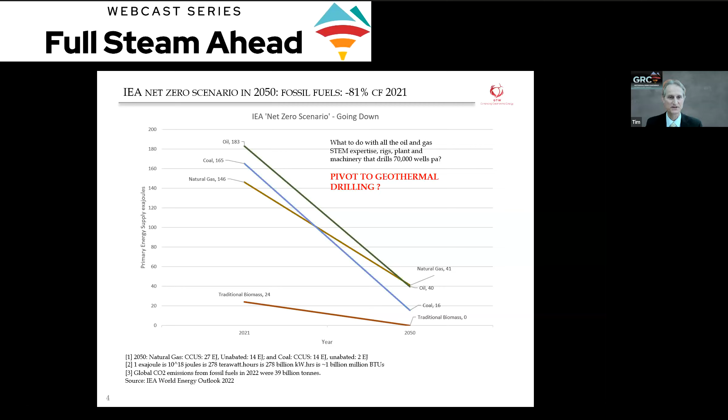My key question is, well, there are 70,000 wells drilled each year, or that's the plan for the next 3 or 4 years globally. That's an awful lot of equipment and an awful lot of people who know what they're doing when it comes to drilling complex wells across the globe. Perhaps this is an opportunity for them to consider pivoting to geothermal, because as I'm sure you know, many of the technologies and equipment used in the two industries are the same or very similar.

So what does the IEA think is the right way to achieve this net zero target? Well, there are perhaps no real surprises. You've got wind, solar, and bioenergy going up, nuclear doubling, and a bit of hydro. There's an awful lot of hydro in the world now, so there's not a lot you can do more.

And this other category called 'other' - I suppose you won't be surprised to know that somewhere in there is geothermal, but it's so tiny that the IEA don't feel there's any need to split it out. But I do. So that's where geothermal stands.

I guess some of you will have seen this. To me, it was very arresting. This tiny little dot down there is the amount of fossil fuel energy in the earth's crust globally. This is the amount of fissionable materials, and that's the amount of crustal geothermal. I want to make the point that crustal geothermal goes down to quite a deep level, probably deeper than we'll ever reach, but there's around 20 to 30 million years of supply at the 2050 level of energy use, if you could deploy crustal geothermal totally.

But the reality is, in 2020, this is how much electric energy and global direct heat energy the globe actually used that was geothermal. So really, we are nowhere. And the question is, can we actually make a material impact in the next 35 years or so?

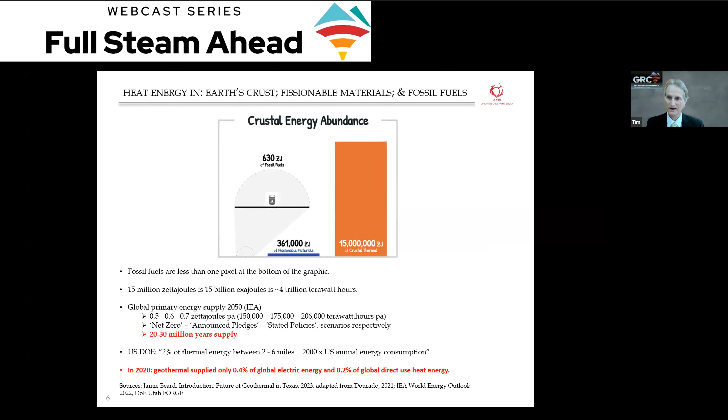One thing I'll pick up on there is that nuclear - they're looking to double nuclear in the next 30 years. That's the objective the IEA put out. Let's just look at that. Why? Let's look at geothermal versus nuclear. In my view, geothermal has enormous advantages over nuclear in pretty well every category you can imagine.

You can read this as fast as I can say them, but they're reasonably obvious. It's certainly cheaper. There's an awful lot less baggage, both in the initial planning applications and permitting, and the views of the local population, and then of course in the abandonment, 60 or 70 years thereafter. It's also much more flexible in terms of load following, although modern nuclear reactors do have greater load following than the old ones, where in fact you're at 95% capacity utilization, and that was it.

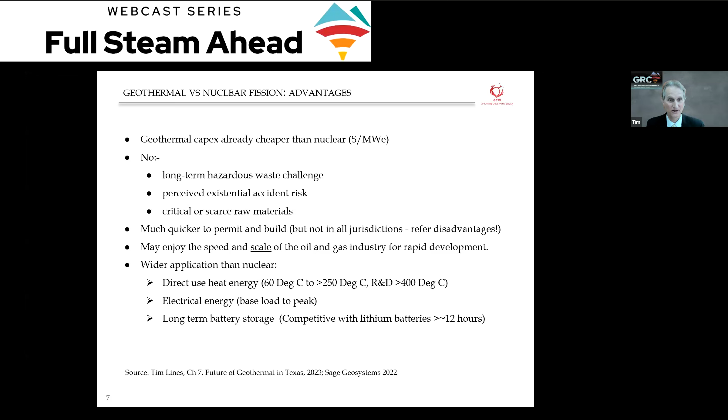But look at that, and also in terms of temperatures, we can provide from 60 to 250 today quite easily, and a lot higher later. So that's kind of where I think there are disadvantages for nuclear.

The most important is that most of that energy is in hot, dry rock, and therefore we need to frack. Also, for some of the technologies, there are fairly substantial parasitic pump loads - I guess 20% is the number I keep working up. And of course, last but not least, a ton of water is worth nothing like as much as a ton of oil.

Since generally speaking, you're deploying the same technology, capital, and people, when it comes to investment, the rates of equity return are much lower. That's the big challenge. And indeed, for a lot of reasons, that's why it's been quite hard to get geothermal off the ground. But by no means, in my view, is it an impossible task.

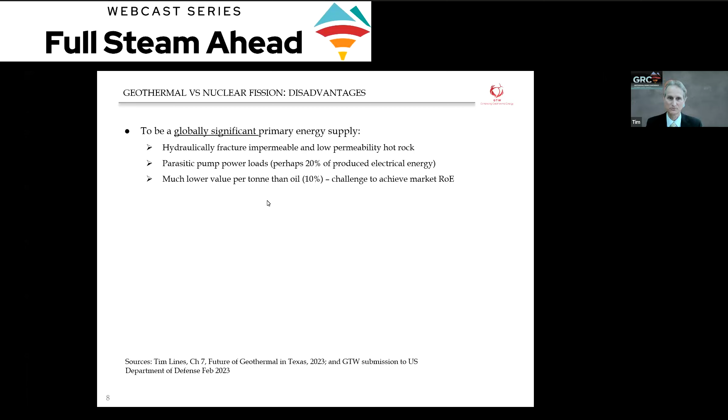So for those in the audience I don't know, I thought I'd at least introduce you to what a comprehensive frac job looks like in the oil and gas industry. This is roughly what you'd see if you had a drone - this, of course, is above a typical Marcellus frac site, and that gives you the eyeball view there.

This is a pond which we use to pump our frac fluids. Those from Fervo and others will know all about this. That's what we prop with - we prop with several things. Actually, we prop with bauxite for very high tensile stress regions, but generally speaking, just fine-grained sand.

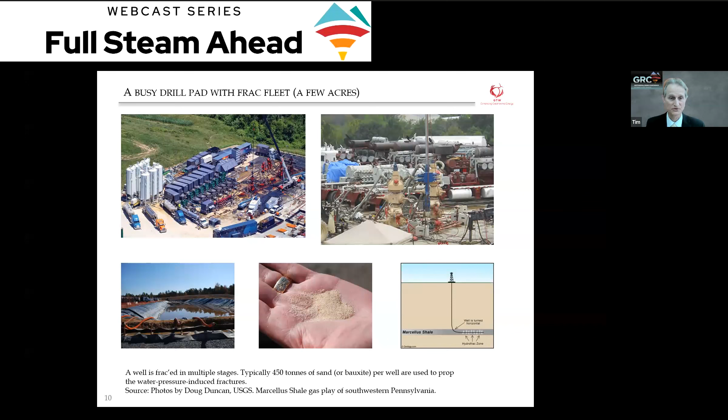I'm sure you've seen pictures like this before. And when it comes to EGS, these are the kind of technologies that would be used for an EGS well or wells, like, for example, it will be happening at FORGE in a month or two's time. For those not so familiar with what this looks like subsurface, they're like penny fracs, really.

Some of them are squashed a bit, but what we're trying to do is create a squashed penny so that we get some height and a lot of length, so we can maximize the distance between our shale wells, but the same is true for injector-producer pairs. The advantage of fracking in shales or indeed some clastics is that you get a natural barrier at the top and bottom of those reservoirs, which helps control the frac.

Whereas if you're fracking in a granite or basalt, which is fairly homogeneous, the fracs tend to be pretty well circles, they're pennies, and it's quite hard to control that and make them more like a squashed penny. Though there may well be people in the audience today who can tell us more about how that can be done.

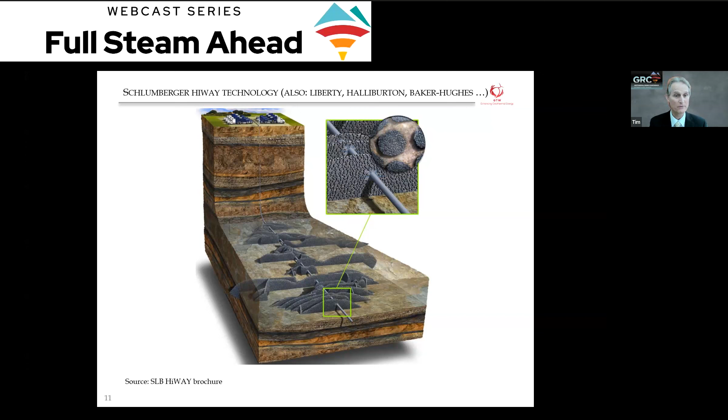So this is quite normal. There's a fairly significant and rigorous traffic light system, but we're looking at something like 4 on the Richter scale before anybody gets excited at all, because in Iceland they're pretty used to earthquakes anyway. A human-made earthquake to increase the amount of geothermal heat for Reykjavik is no problem to anybody, really.

One lovely fun fact I found when researching for this is another way of getting a magnitude of 1 on the Richter scale is to get yourself a 0.6 mile long freight train and rumble it down a track. If you're skillful, you can deliver a seismic quake of 1.0, which is a very cheap source of seismic for a seismic survey. So there we are - a thought just to lighten the load a bit.

My real objective here is to say, what is it that the oil and gas industry have got that could potentially be useful to the geothermal industry? I'm not going to focus on technology - I'm imagining in the audience there are many people who know more about how geothermal technologies are applied and to what extent oil and gas technologies could enhance those, and vice versa. That's not my focus here. What I'm going to do is look at a wider picture about how we can use other aspects of the oil and gas industry to help accelerate geothermal developments.

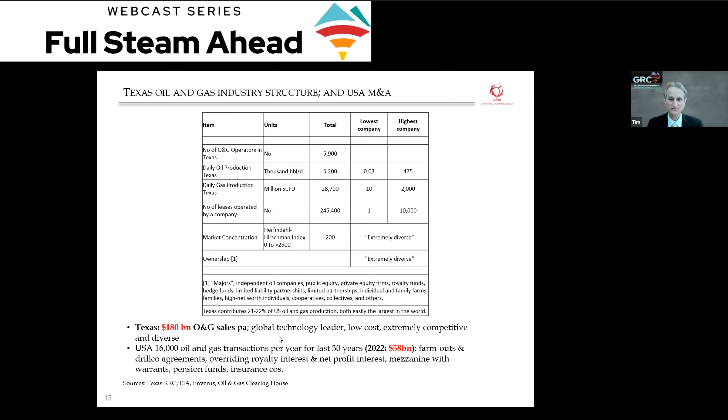So PE, private equity, and a few listed vehicles. So nothing like the same level of variety, and of course nothing like the same scale.

And it's very important to be able to move efficiently assets on once they no longer serve your purposes for your particular risk category and your investors or whatever it is. And when you have such a low number of transactions, that's a bit of a block to moving to an efficient marketplace. And the actual value - if this were the approximate number of transactions, then you're looking at about $150 million a year, which again, you know, is very small compared with the billions we saw before.

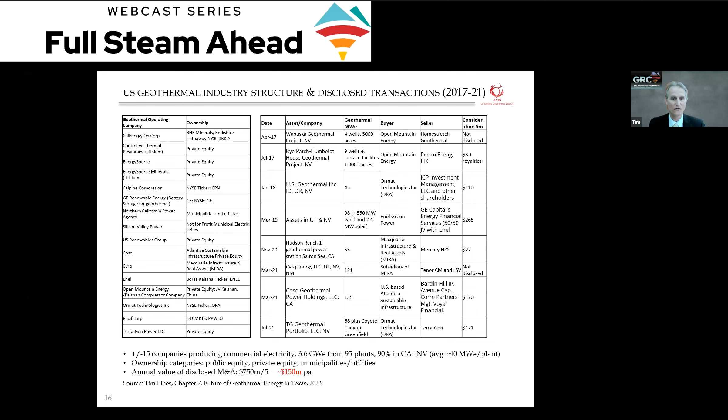So that's the kind of characterization of the geothermal industry as I see in terms of structure.

Let's look on. There's been quite a lot going on in the last 3 years, certainly since I've been waking up to this. And I expect a lot of these names you'll recognize. They're all upstarts, they're all new entrants. I mean, some of them also very big companies, but they're all getting the message now that it really is interesting and worthwhile deploying capital and expertise to geothermal industries.

And as you can see, very big companies are in the news a lot now. Most of the oilfield service companies are now doing something. Nabors, you'll recognize some of these. But actually, I think Jamie Beard worked out there are over 200 accelerators and very small companies started up in Texas alone in the last 3 years.

Some of those have risen to the top, as it were - Fervo, I think everybody knows, Criterion, Sage, and they tended to link up with some pretty big players. But plenty others are actually thrusting there as well. I mentioned a few there, and some interesting names like Google.

And the other thing that's happening is there's new structures forming, and here's some in Texas. I'm relying on Texas because that's really the only place I have a lot of knowledge of what's going on in the USA geothermal sector. But as you can see, people are getting together and forming appropriate organizations for lobbying and for sharing information, universities getting together to share expertise.

And the other thing is that Project InnerSpace, based on the success of the Texas study, has now, or is on the point of expanding that to 10 more states within the USA. So to try and roll out the same kind of detailed analysis of the prospectivity of each state and all the assets associated with it. So a very active and very exciting place to be.

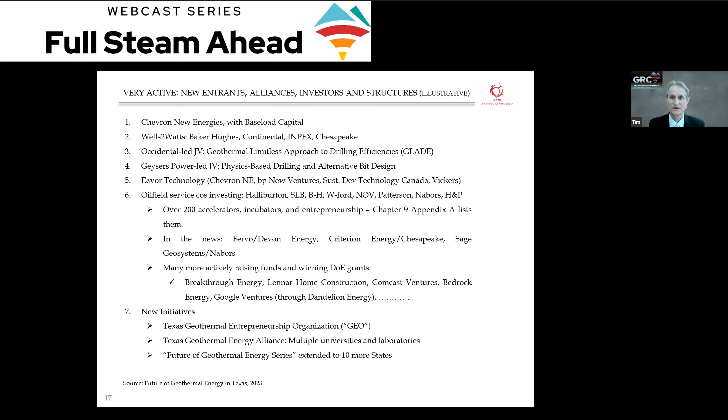I just wanted to talk about finance a bit when it comes to being a small company. My view is that geothermal companies have pretty well the same challenges that oil and gas ones do, except the revenue stream is much lower for the same level of risk. But I wanted to make sure I articulated the kind of processes small companies have to go through in order to get to a stage where they're material and can start doing projects.

Most of this is equity. This is where you have to give up part of the company or part of the project in order to attract investment from someone who is hopefully aligned with your objectives, maybe has a big balance sheet, and maybe has technology or other aspects that would support you. But this is the hard one to get going.

Startups normally need $3, $4, or $5 million to get going to do something that will add value to an asset. Once you've done that, you can start saying, okay, we've got something that's certainly worth selling some part of. But in order for us to then add value to it, maybe drill a well or acquire a seismic survey or some other information.

And that's when you go to a venture capitalist or venture funds, etc., and try to cut a deal where they would pay for a well or two in return for maybe 25 to 50% of the equity in your company or in the project if you've got a kind of umbrella structure. And so it goes on.

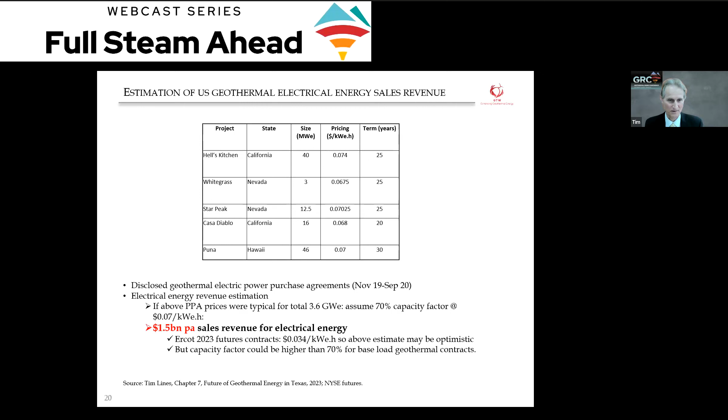So let's look at the other side of the equation - what about heat? So direct heat. I had a look at the USA and said, okay, how much heat energy is there other than ground source heat pumps? I was absolutely flabbergasted when I did the calculations - I did them 3 times, I couldn't believe it. But the actual gross revenue stream from heat sales, excluding ground source heat pumps, which are very large, was $28 million if I assumed $4 per million BTU. So that's for the whole of the USA. In essence, the USA is not interested at the moment in providing direct heat to any of these categories.

And the interesting ones to me are industrial applications, where it's probably 0.2 or something. Certainly we all know about greenhouse heating, and that's why that's there, fish farming. But they're insignificant.

Just to give you a contrast, look at China, a similar sized economy. They're looking at roughly $750 million using this $4 million BTU proxy for the value of energy in both countries. The big differences are district heating run by geothermal energy, and bathing and swimming. But when I look at the ones that interest me, like industry, there's nothing there, $30 million, nothing, a little bit of farming and heating. So although they've got part of the story, they've only got part of the story.

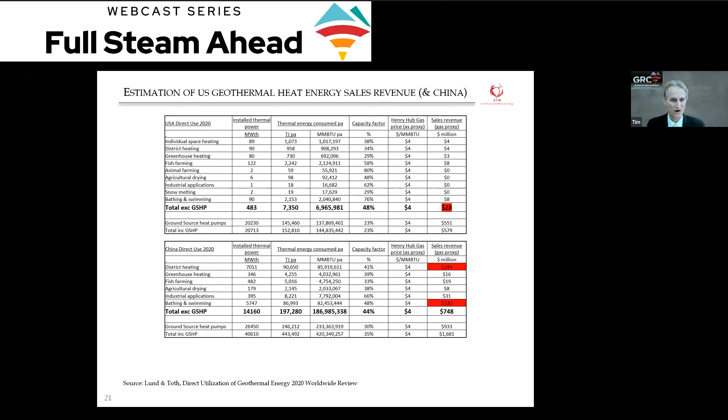So let's look at what the potential might be, and I'll explain why I'm passionate about heat and more cautious about electricity. Just to show you what China's been doing - there's nothing here that's a particular surprise, it's just the scale.

Roughly 70 cities in China are partly or totally heated by geothermal district heat. That might be millions of people - I don't know the exact number, but it's going to be very many millions. These are rather pretty pictures about the kind of things we all know you can do with district heating.

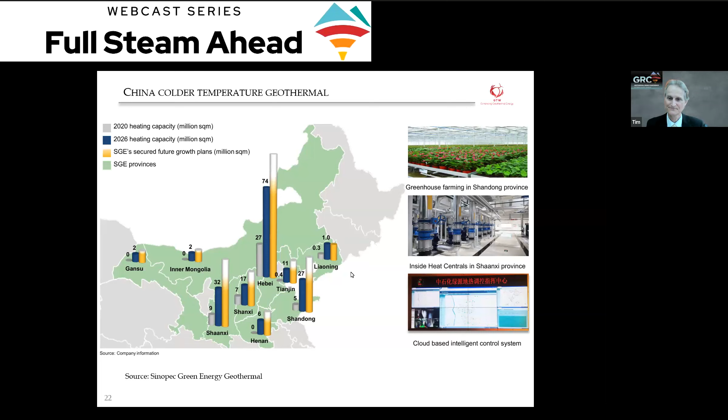What is interesting when I looked at why it has rolled out so effectively in China is actually the flexibility and the passion that the municipalities have in making this happen, to the extent that they revise the building regulations in their municipalities to ensure that geothermal district heat, which tends to be colder than coal-fired or gas-fired district heat, that the buildings will be able to accept that and still be warm enough. So these are air tightness regulations, insulation regulations. That's a pretty impressive thing for a municipality to do - to say we will fast track geothermal whenever it's possible.

And actually, they got to the stage now where geothermal district heating on a dollar per MMBTU basis is cheaper than gas and coal. So it's not only clean, it's also cheap. That's a pretty good result, and just shows what you can do if you start to get everybody working together within the circular economy you need.

So why am I more interested in heat than electricity? Well, let's look at electricity for a moment, compared with its main competitors today, which are gas and coal within the USA, and nuclear to a lesser extent, and maybe more in future.

This drawing, which many of you will have seen in one form or another, comes out of a New Zealand paper in 2012, looking at something like 90 or 100 projects around the world. They looked at the reservoir temperature as a source of enthalpy, and then looked at the actual outputs - after all the losses at the factory gate, how much electrical energy did you get for a certain amount of thermal energy produced from the reservoir? This rather depressing graph shows that even at 180 centigrade, some of their technologies were producing only 8 or 10%.

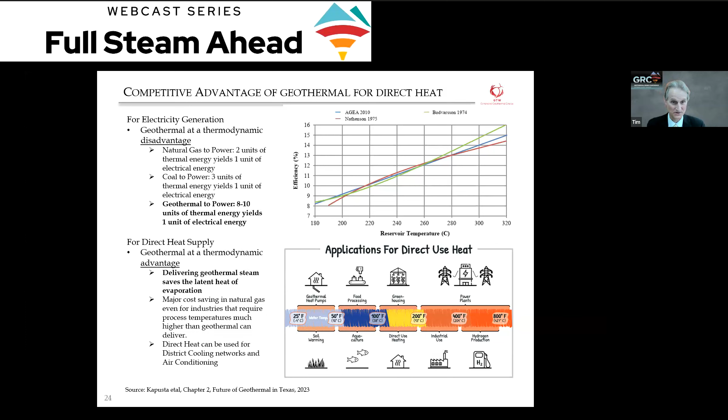I've taken the food industry in the USA and got some data from various sources, including the Department of Energy. Just looking at these numbers, you don't necessarily have to have a feel for them, just look at the size. We're looking at roughly 67 gigawatt thermal, assuming 100% load factor, which is wrong but gives you a like-for-like number, and around 90 gigawatt thermal for the processing industry. That's just for food, okay? And never mind the other things which probably geothermal can't do very much for.

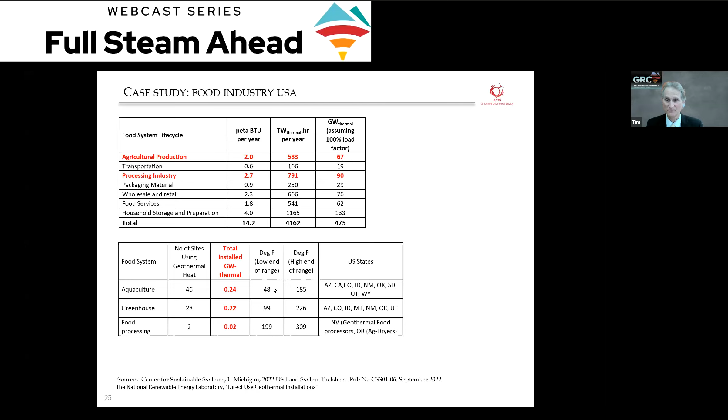Now if you look at all of the aquaculture, greenhouses and food processing that I could find within the Department of Energy website, and look at the total installed gigawatt thermal and compare it to those numbers, this doesn't even come to half a gigawatt thermal. So it shows you how little of the potential for using direct heat from geothermal has actually been applied to these sectors. Look at the ranges - these are eminently achievable by a lot of geothermal plants.

Quite a lot of states are involved, you see this. I actually had a note from the Commonwealth of Pennsylvania, saying why weren't they on it? I couldn't find anything on it. But I did make the argument that there's an awful lot of milk pasteurization that goes on in Pennsylvania, and pretty well all that milk has to be heated from, I don't know, 60 Fahrenheit to 100 - I don't know what the pasteurization temperature is, 140, 150 Fahrenheit.

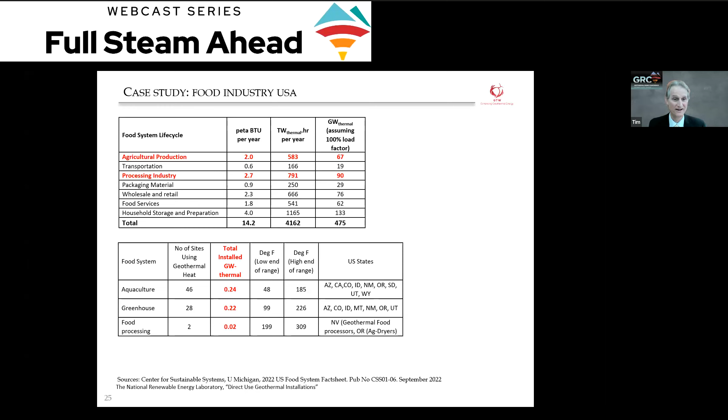At the moment, that's done either with electrical heating or with natural gas boilers producing water, which then through a countercurrent heat exchanger heats the milk up to the appropriate temperature for pasteurization. I thought, well, I can't think of a better and more obvious application for using geothermal heat above 140 Fahrenheit than just passing it into a massive milk pasteurization plant, producing - I think it's billions of gallons of milk per year - pasteurized just in that one state.

So to an extent I've said some of these things. I just want to say how much more efficient it is - although the data shows that in the USA, geothermal is actually quite a high emitter of carbon dioxide. The reason is because there are methane co-emissions in most of the geothermal plants on the West Coast.

But if you were to go for hot dry rock, the kind of EGS or AGS systems, then these emissions would drop from 19% to 1 or 2% of a typical fossil fuel one. It just so happens that the particular set of assets being developed within the USA have unusually high methane co-emissions. But if rather than making electricity with your geothermal heat, you just use it directly for some of those processes, then the carbon dioxide emissions drop through the floor compared with any fossil fuel.

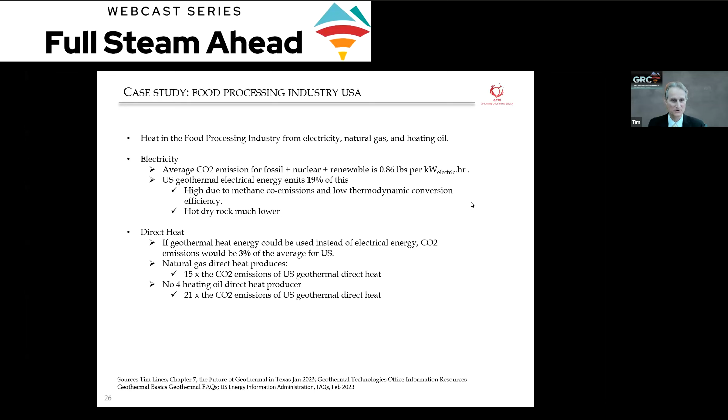If you look at natural gas, for example, it emits 15 times those of geothermal heat, and number 4 heating oil, the most common liquid fuel used for industrial processes, 21 times. So there's a huge potential target there to decarbonize industry. And here's a nice one - I've tried to find all the different potential industrial processes in the food industry and what temperature they needed.

And then I tried to color code this by saying, well, how deep would you have to be depending on whether you had a low, average, or high geothermal gradient, so that those of you familiar with these things would say, that's an easy well to drill, and you could view which applications could be accessed as low-hanging fruit. As you can see here, there's an awful lot up to about 160 Fahrenheit, and it's pretty easy to get there even with a low geothermal gradient. Typically the USA is around here, or even there sometimes.

So you're looking at wells of 7,000 feet, which for an oil and gas operator or veteran from the oil and gas industry, and I'm sure from the geothermal industry too, is a walk in the park. I mean, it's nothing. It only demands planning and a couple of casing strings, unless you're unlucky enough to be in a hydrocarbon-rich area and have to case off the hydrocarbons. It's a pretty simple thing.

And even at amber levels of 270 Fahrenheit, you're not looking at that deep. I mean, 19,000 feet - if you're unlucky enough to be in a low geothermal area, that's not a big well really. If you turn the corner, you're probably going to be limited on the size of your horizontal lateral, maybe only 3,000 to 4,000 feet. But that's the low case.

If you look at more optimistic cases, you can get those temperatures quite easily at 10,000 to 13,000 feet. Every Haynesville well is 13,000 feet and could have a 10,000 foot lateral. So these things are right within the normal ballpark of the thousands of shale wells drilled on an annual basis within the USA - I mean, 15,000 wells a year in Texas alone. So I think there's a lot of opportunity here if we put the mindset on.

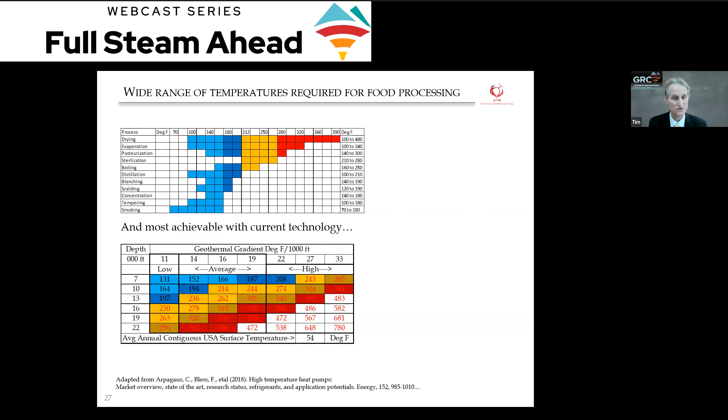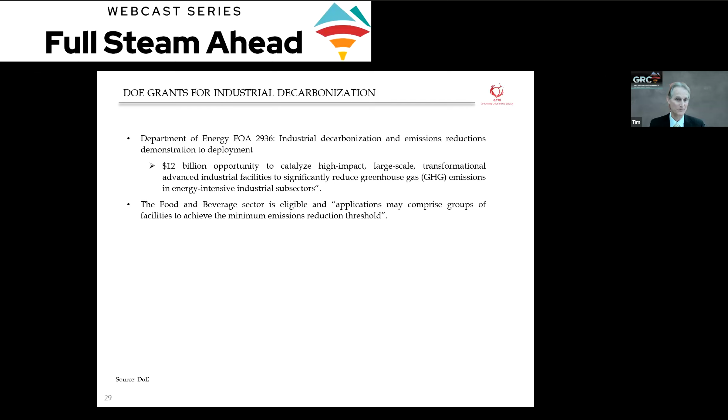There's demonstration projects for the different industries. So the Department of Energy are on this and very motivated and keen for the kind of things I've been saying to actually happen, not exclusively with geothermal, but with all the clean energy sector. This is another one I liked - actually, this is in Iceland, but the technology is there.

But you're getting an idea of a potential application here, direct air capture, and this is just one of several technologies which have been looked at. Occidental, of course, are looking at their own technology here. So there are multiple applications you can apply geothermal to. It's just a question of changing the mindset, so you can continually think about the customer and their needs, rather than - I'm talking to oil and gas people here, not geothermal - our typical oil and gas thing, which is once a product's out the door, it's just a commodity, and leave it to someone else to transport and sell.

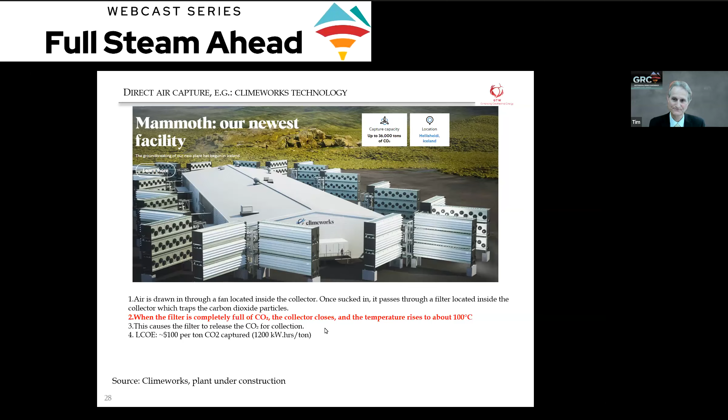One of the things I'm really passionate about, and I think it underpins the extraordinary health of mergers, acquisitions, and investment in the oil and gas industry, is a standard resource evaluation statement system. Now, I happen to be mentioning one of the three here, which is the Society of Petroleum Engineers Petroleum Resource Management System, not least because as a competent person, this is the one I apply most within the oil and gas sector. But the others - the SEC, NYSE, and in Canada, COGEH for the TSX - these are very similar standards.

And the most important thing about these standards is that they are understood and accepted by everyone in the industry, from the regulator, the stock exchanges, to the investors, to the operating companies, to the competent persons, the companies like Oilfield International, Sproule, the big ones in Canada, etc.

Because there's a requirement whenever you conduct a major financial transaction in the oil and gas sector, you need a third-party auditor to make a statement of what your assets are, according to a very strict set of definitions. That means, because there are so many transactions, you have a virtuous circle, an enormous number of independent auditors. You probably know the big ones, DeGolyer and MacNaughton - in the UK, US there are about 3 or 4, Gaffney Cline, I can't think of the names offhand, and a couple in Canada. They have huge competencies, and a lot of clout in the industry, and what they say goes when it comes to whether that's a reserve or a contingent resource, and everybody is happy with that.

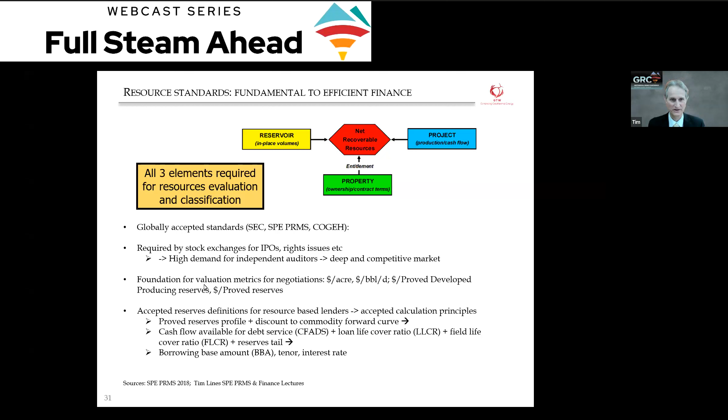So maybe 300 basis points above the 4%, so a 7% interest rate. It's all so easy, that's what I'm trying to get to. Get the point - everybody knows the language. It's dead easy, we can all do it in our sleep, those of us in that part of the industry.

We have these two-dimensional matrices completely familiar to everybody in the industry. Reserves are the most valuable, then contingent resources worth at most a tenth of what reserves are, then prospective resources not worth very much - we haven't drilled a well yet, so that's why they're called prospective. This represents an increasing level of commerciality. Have you got all the permitting? Have you got the money in place? Are you clear in your mind that you have the right capital cost estimate? And what's the range of uncertainty between the low case and the high case of what you're actually going to produce?

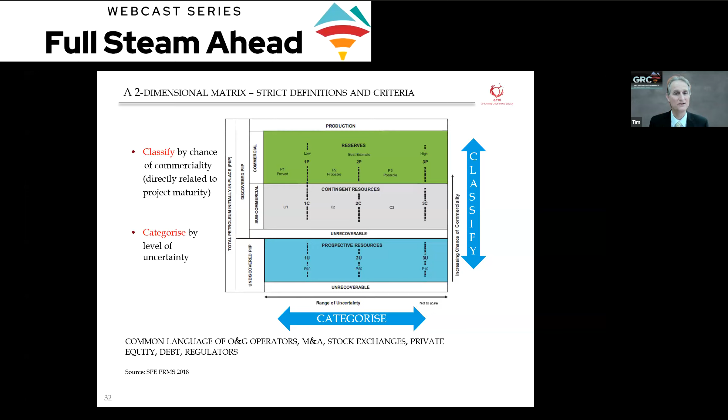That's where we are - common language. We all know it, and it makes life terribly easy in the oil and gas sector. Now let's look at the geothermal sector. There is one standard at the moment which is trying to gain traction.

Professor Gioia Falcone from Glasgow University has teamed up with the United Nations and more recently the IGA (International Geothermal Association), IRENA, ESMAP, and the World Bank, to see whether this three-dimensional matrix structure, used for mineral resources and other renewables, is a good standard for the geothermal sector. With a degree of success, in September last year the Queensland, Australia regulator adopted this as the standard they should use.

But that's as far as it's got so far. The most important thing I want to say is there is no consensus in the capital markets on what is the right resource standard - this is just a regulator. I'm talking about capital markets because unless they are comfortable with what really constitutes a reserve, there's a big barrier before everybody can agree what it is they're buying or selling.

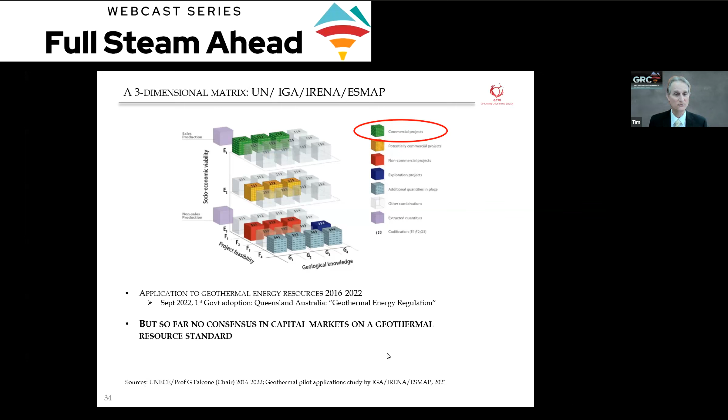So how do we do it? These transactions still take place, so I want to look at how geothermal projects are funded. For companies like Ormat, Calpine, Cyrq Energy, etc., it's easy because they've got big balance sheets and internal skills - they can fund off the balance sheet, maybe with some debt or revolving debt. That's why they're so important to the future of the geothermal sector: they have no problem putting together large sums of capital for new projects.

Now let's look at the rest of the financial community who will need to engage if geothermal is going to really accelerate as a major energy source. Private equity or new entrant public companies can really only hire a consultancy - Schlumberger's Geothermex or someone similar - and ask them to evaluate the asset. There isn't a common standard, so you use the same consultant, probably, for all your evaluations of geothermal assets, lithium assets, or whatever it might be.

It has logic and it's consistent, so a private equity firm can make a rational decision between various potential investment opportunities, and no doubt will do a good job. But if they need to syndicate - say it's $500 million and they'll take 100 and want to offload the other 400 - then what happens? The other investors have to decide whether to trust the original consultant who did the work for the cornerstone investor, or do their own work.

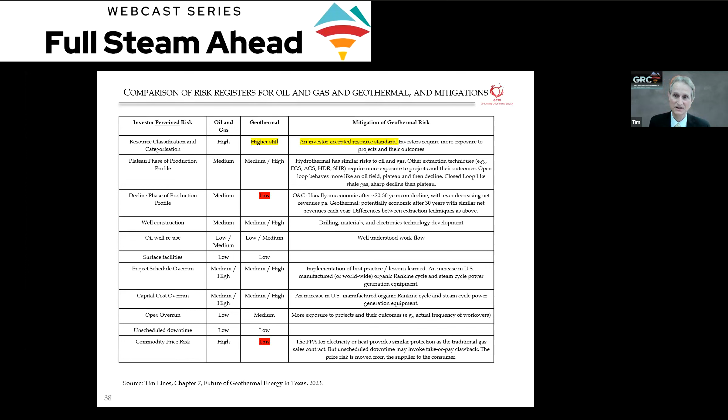What I'm trying to say is the cost of equity for geothermal projects is lower mainly because you've got less commodity price risk than you do with oil and gas, and investors have to look at commodity price risk. To cut to the chase, my view is that you can probably get away with a 12 to 15% equity rate of return, and that's attractive to investors pretty well across the USA.

In Texas, less, because the subsurface is so heavily de-risked. People know the subsurface very well, and therefore the subsurface risk, which is a major component of the total risk an equity investor looks at, is to an extent lower.

Also, because of the zeitgeist around geothermal, you've got various other institutions who won't demand even a 10 to 12% rate of return on cost of equity because they have other objectives, usually ESG. So municipalities, not-for-profits, direct use customers that a geothermal company might work with, maybe a paper mill for example, military and critical infrastructure where reliability or independence from a grid is important. All of these could well look at cost of equity well below 10%.

And if you look at what it is for wind and solar, the cost of equity there is less than 10%, even 5%, which I think is irrational. I can't see how any investor, unless they have some other uplift, could accept a 5% rate of return on their equity from a solar project.

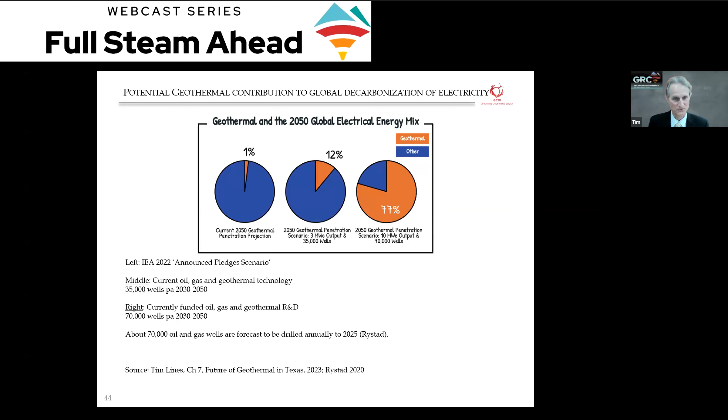If you look at the amount of heat we've got in the globe, that will give you some indication that this is well within the capability of the Earth to provide for hundreds of millions of years. Thank you very much.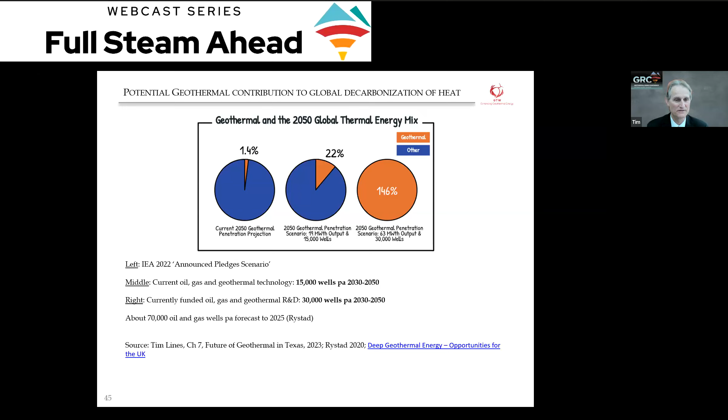It's about your investment class that you're considering and venture capitalists and what kinds of returns they look for in investments. So go ahead, Jeff.

Okay, can you hear me? So, talking to venture capital, they expect triple-digit returns, and sometimes more, and they have about maybe a 10% success rate or less of things they invest in. So when you talk about the risk profile of geothermal, that's kind of the rub.

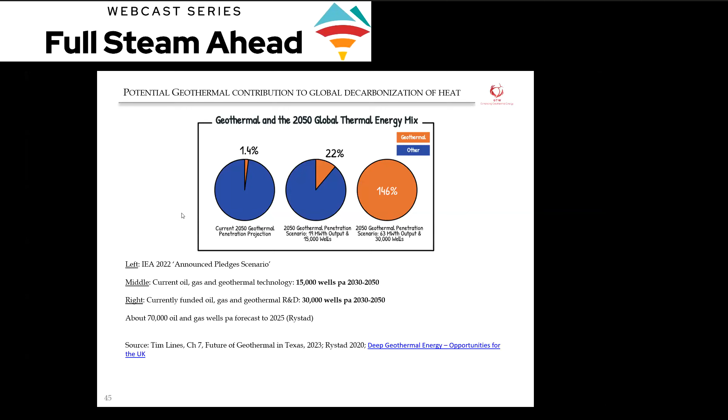So given that I agree with your numbers, just 12 to 15% is a pretty good analysis, and therefore, who are the investor class that you are targeting?

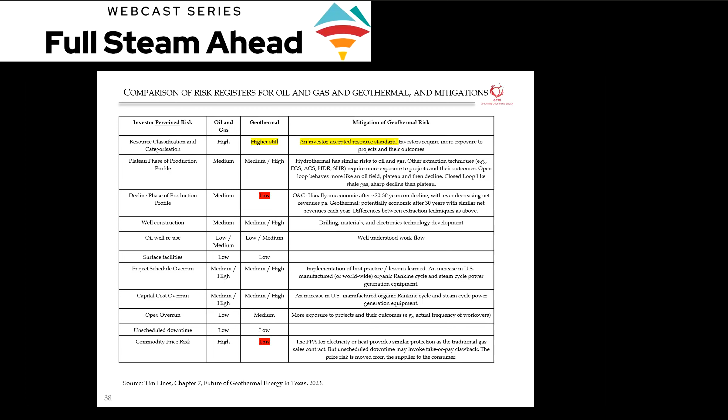Oh, okay. Well, I think I tried to give you some idea here. Okay, yeah, so we're talking about Jeff. We're on the same page here, that the problem is the initial capital, and how can you get to reasonably high levels?

Well, this is where I've come to. I had a conversation with a fund manager who said that he would be looking for 15% real terms rate of return. He would, and the reason that you're not seeing the multiples that you're referring to - I mean, you and I are the same industry.

I mean, if you're going to get a farm into an asset that hasn't been de-risked, you can be looking at 5 to 6 times your money within 6 to 9 months, or else you're not interested. And that's the oil and gas way.

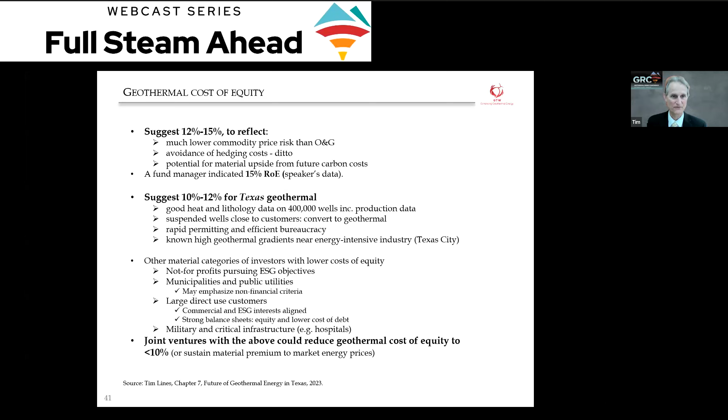But the argument I'd make is that it is a less fundamentally risky business. And the key reason is when you and I do our sensitivities for saying what is the extent of risk between the low and the high case, commodity price is always the one that you flex the most, because that's the one that can trash your project or cause it to be very, very, very profitable.

And the second is capex or schedule, and the third is the resources in the reservoir - or the second and third can change round. But the argument I've got with the financiers I've been talking to is that the one thing you can get rid of is the commodity price risk.

In the capital asset pricing model, all of that beta associated with volatility of price is pretty well removed, because once you've built the wells, both the investor and the customer have a stream of revenue where they know what the price is per million BTU, and that is one way you're de-risking it.

It's not for everybody. I think the other thing is you're pushed into selling the ESG card, and selling the card that says if you are a resource investor, then because of the zeitgeist, you're going to be finding it harder and harder to attract your LPs.

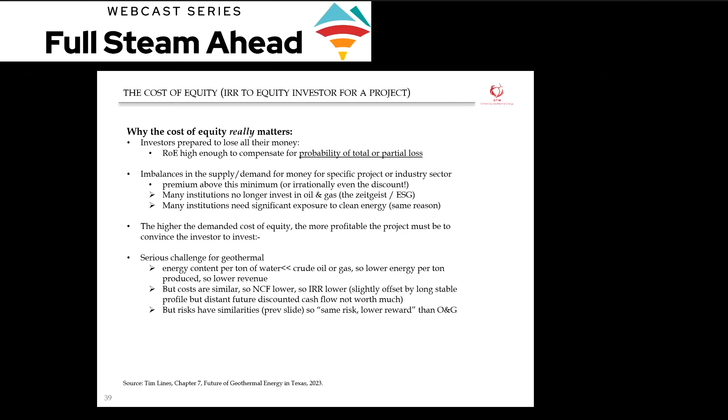Historical precedent. We had 50 years of geothermal, that's the first thing I'd say. The second thing is costs. If you look at the estimates they used when they did their economics, we challenged them. The geothermal technical section within the SPE asked a representative of the IEA why, once that 2022 report came up, it was so low, especially since they were sitting in the geothermal technical section themselves. And the answer was, well, we did use 2012 data because that was all that was available.

And if you want us to revisit our views, then you need as an industry to provide us with the data that will persuade us that what we said is pessimistic. The other thing, if you look at the logic and the arguments I put forward, those weren't within the IEA's assessment.

So they weren't thinking about what the oil and gas industry will do with all its immense capital and resources, which are ideally suited to two things: drilling wells for carbon sequestration and drilling wells for geothermal. I think that by taking a broader global view, you can become more optimistic. But ultimately, it has to be a decision of the oil and gas companies to deploy those resources and capital in geothermal and obviously CCS.

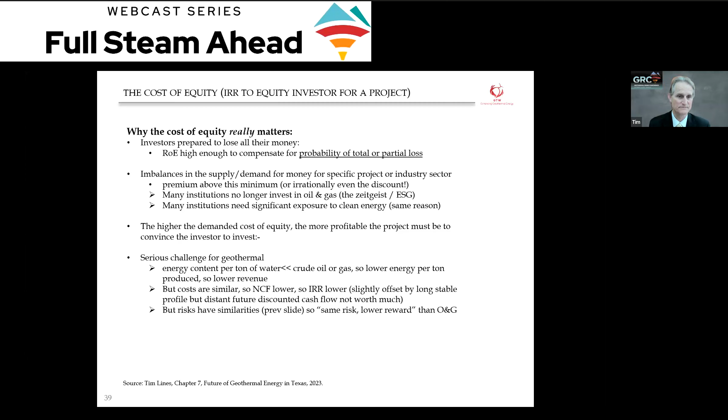I'll also add, Andrew, from my own research in this space as to why energy technologies remain stagnant: there are social and policy reasons that geothermal is still a somewhat nascent technology, and the geothermal industry does not receive the same types of support from governments, both in the United States and abroad, that all other energy technologies have received over the last 100 years. Without those government programs that reduce the risk of exploration or help geothermal move across that commercialization gap, geothermal will continue to struggle.

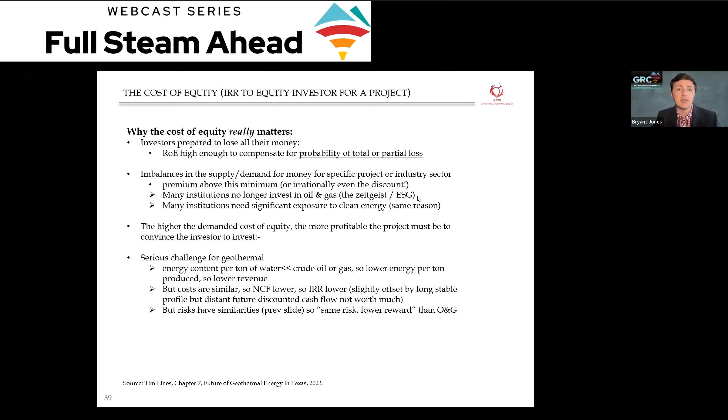So it's something that Geothermal Rising, along with Project InnerSpace, Texas Geothermal Energy Alliance, and SPE are all working together and aligning themselves to try to change, so that geothermal has a seat at the policy table in capitals, both state, provincial, and country capitals around the world.